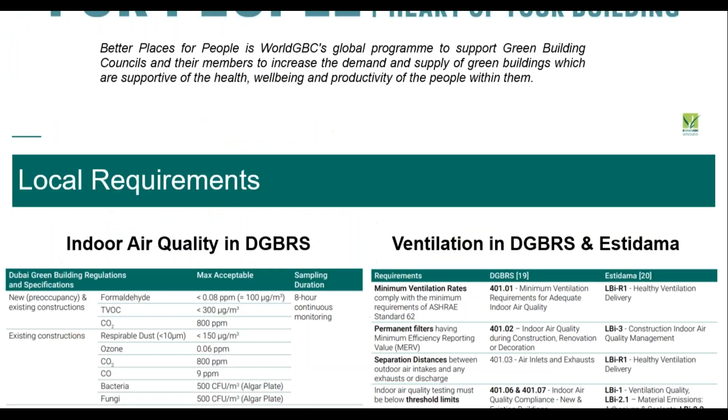Moving on to our next work, just to give you an overview of the regulations and codes we have here in the UAE—there are a number of different building codes which vary from emirate to emirate. On the left-hand side is the Dubai Green Building Regulations and Specification, which is the green building code here in Dubai, with predefined limits for indoor air quality parameters such as formaldehyde, TVOCs, and carbon dioxide.

There are also ventilation requirements both in Dubai and Abu Dhabi, related to the Estidama Pearl rating system. On the right-hand side table, there are requirements for ventilation rates, filters, separation distances, and of course threshold limits for predefined chemical concentration values.

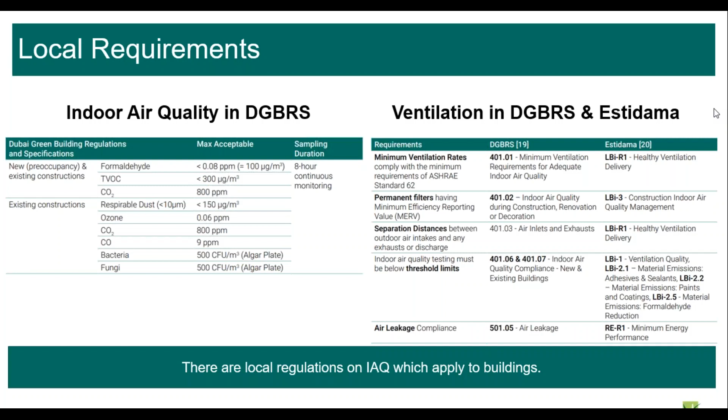Following on from our work trying to increase awareness related to indoor environmental quality, we held a roundtable in 2018 to find out specifically what the challenges and opportunities are related to increasing awareness. It was a general consensus by key stakeholders, including government, schools, parents, and the private sector, that there is a general lack of awareness on the topic, and that more efforts are required to improve indoor environmental quality.

One of the key takeaways from that roundtable was the need to establish more data to set a baseline for indoor air quality within existing buildings here in the UAE.

More recently, a study that came out this week or last week showed that the majority of UAE residents are still unaware of the severe health implications of poor indoor air quality, which is quite significant considering that the World Health Organization says that indoor and outdoor air quality are among the major risks leading to death in the world.

As part of the takeaway point from that roundtable of establishing the need for more publicly available indoor air quality data, we partnered with one of our corporate members, COMPETENCES UAE, to measure and evaluate the indoor air quality parameters of a representative school here in the UAE.

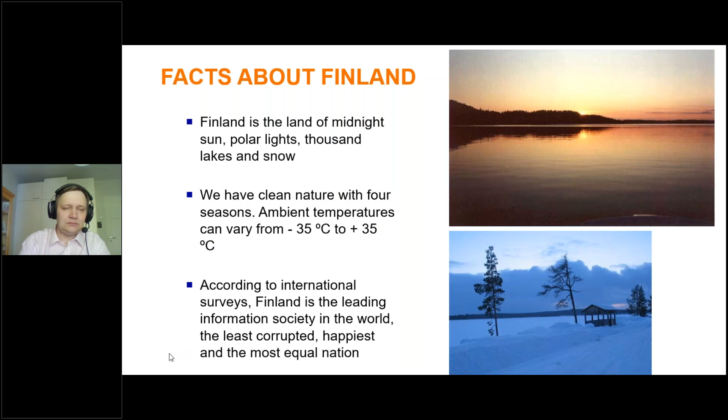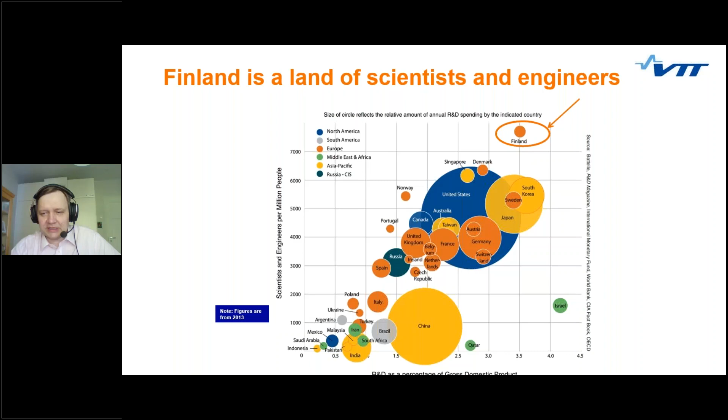The actual content of my presentation today deals with VTT and air quality issues. I will introduce shortly some clean air solutions and some experiences we have learned in field tests we have been running. At the end of the presentation, I will summarize some of the most important lessons we have learned.

First about VTT. VTT is a technical research center, which means that basically the only thing we are doing is research. We do it as a service for companies and societies, but we don't have any concrete products. We always do cooperation with companies if we are talking about products. We are owned by the Finnish government, which means we are a non-profit and impartial organization. It's good to remember that we are impartial in many cases, and we are also quite big if we compare to the size of our population.

The role we are active in is actually applied research, which is located between basic research, done by universities, and product development work, done by industry. Of course, we have close cooperation in both directions, but this is how we see that we are located in this research field.

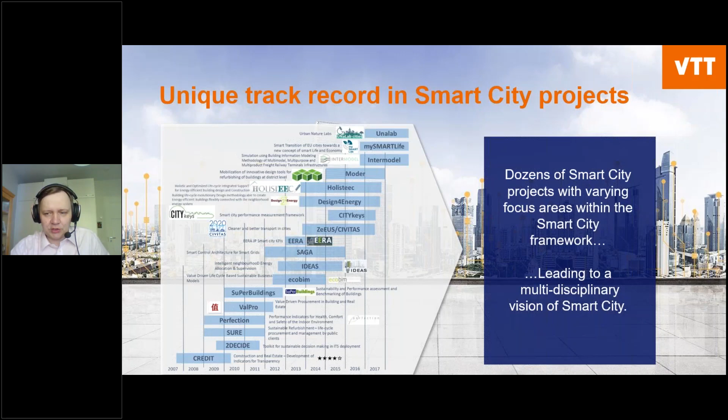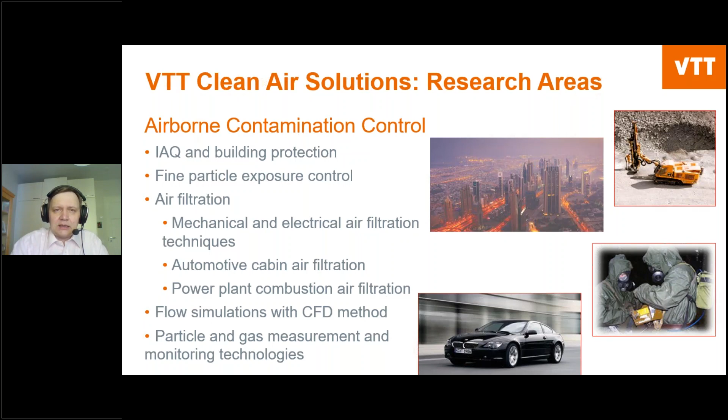We are also doing flow simulation with CFD, which Antti will present more about later, so I won't go into details here. We also deal with different measurement and monitoring technologies, and in any case, we basically try to improve the situation somehow. That is important for us when we do these interventions.

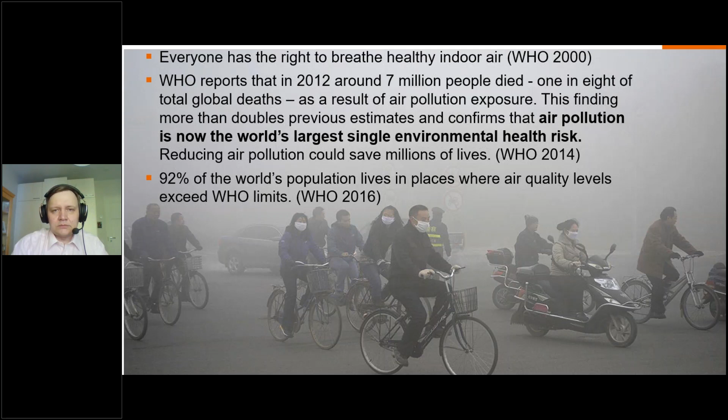As we spend 90% of our time indoors, it's reasonable that we start with these indoor air quality issues. It has been stated that 40% of buildings suffer from some IAQ issues - that's quite a large number, I think. There have also been calculations of how much money is lost because of poor indoor air quality.

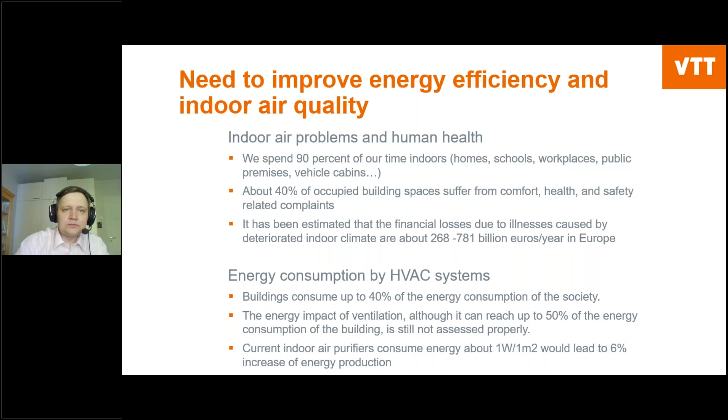One way to illustrate this indoor air quality issue, and especially the money side, is to think about a normal office building and how much it takes to run it. You can see that only 1% comes from energy costs, 9% from rental costs, and 90% from salaries.

If you want to improve things, imagine a 10% improvement in some of these three topics. What's the result? If you're able to improve the performance of the people by 10%, you've actually saved 9% in your financial result, and that's quite a lot. So it's important to understand it's not only a health issue, it's also a money issue.

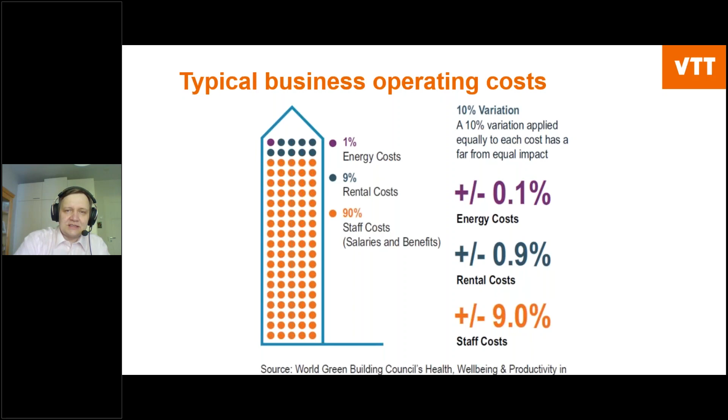There are correlations found between ventilation rate and people getting sick. It's important to understand that the more people inside the building are sick, the less work they're doing, and the less money you earn. That's why it's important to arrange ventilation properly.

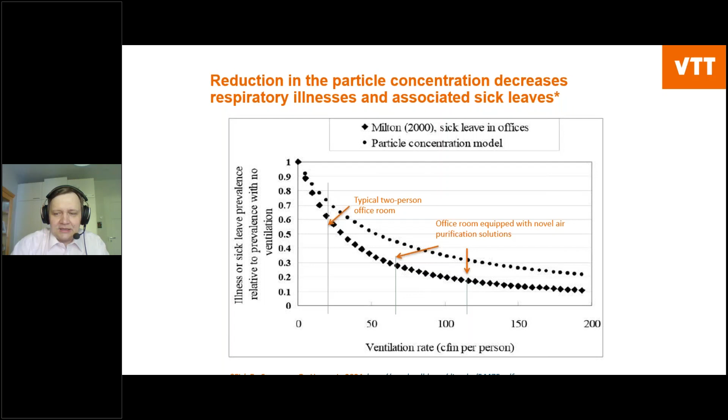It's not only about getting sick, the ventilation rate also affects performance in office work. You can see that especially when airflow per person gets really low, performance goes down. Of course, if you increase ventilation, you get better performance, but there's some limit because it flattens out at larger ventilation rates.

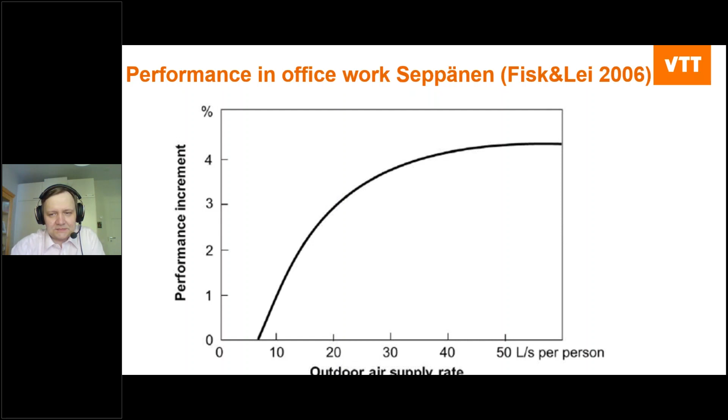A similar pattern can be found for learning results in school. This is based on mathematical tests, illustrating the speed at which students can solve problems. You can see there's quite a good correlation between learning results and ventilation rates, so it makes sense to take care of ventilation.

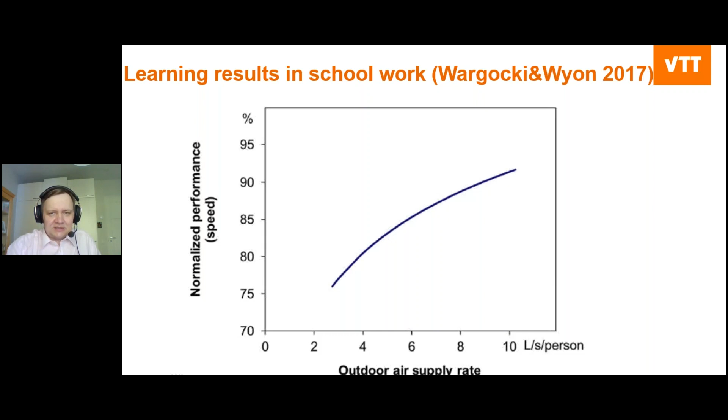So we're indoors and figuring out what's around us: outdoor pollution, the ventilation system, some indoor emissions, leakages, things like that. The conclusion is that if you arrange ventilation, filtration, and air cleaner issues properly, it's actually a convenient way to achieve health and good indoor air quality.

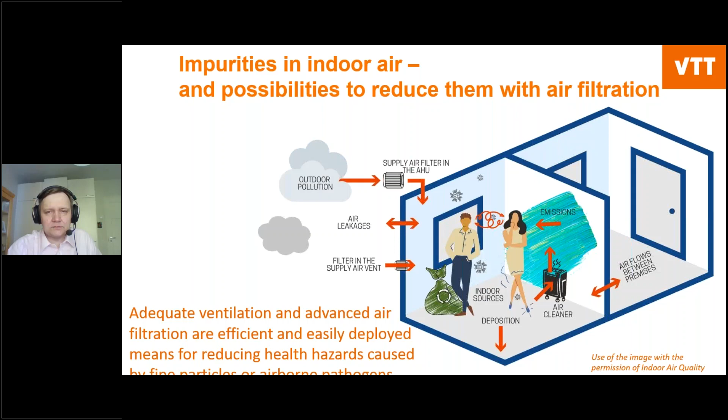This illustrates particles found indoors. At the European level, they've found that more than half of the particles found indoors actually originate from outdoors. So the first thing we must do is figure out how to stop outdoor pollution from getting indoors.

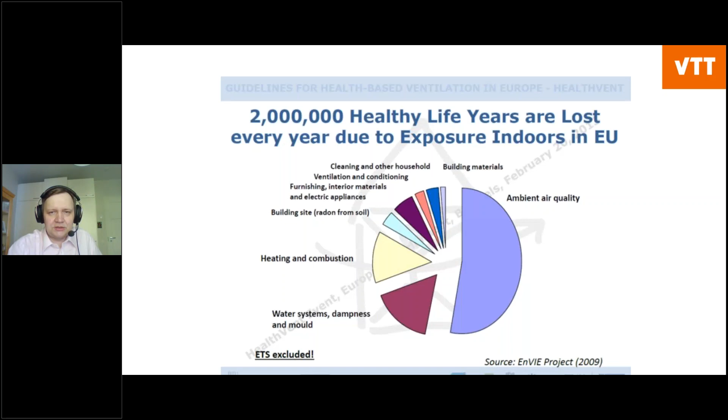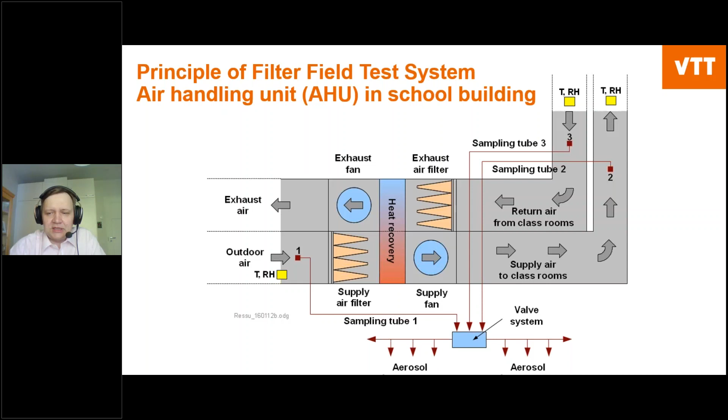So we can conclude that if you want to get rid of ambient air particles, the best thing you can do is use high efficiency supply air filters, because it correlates directly to the concentration indoors.

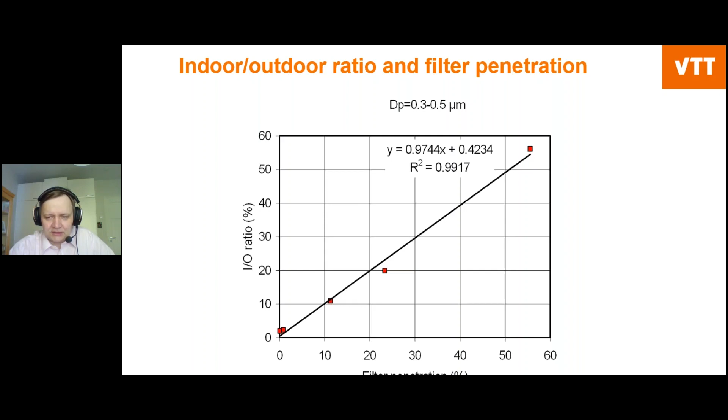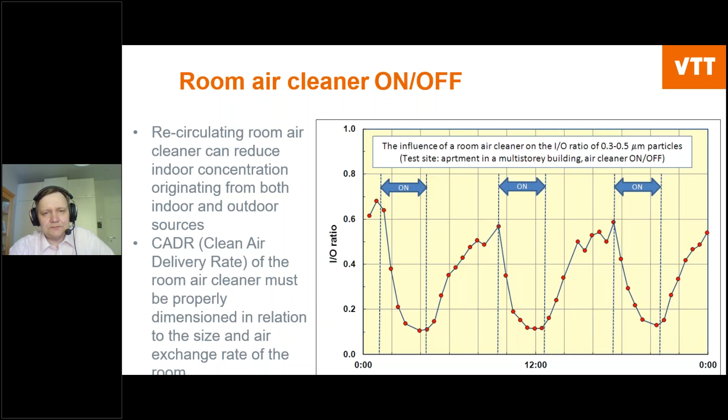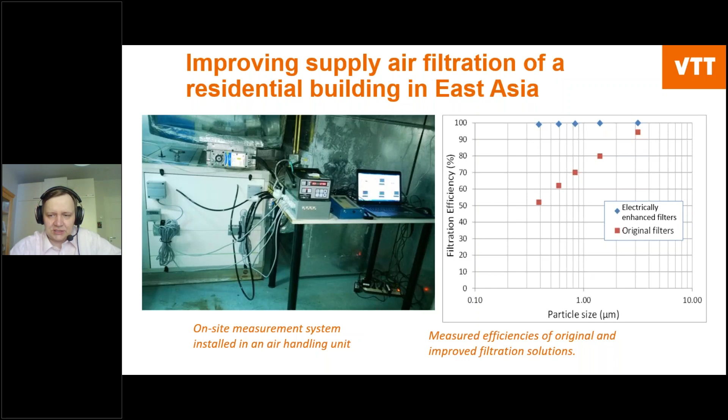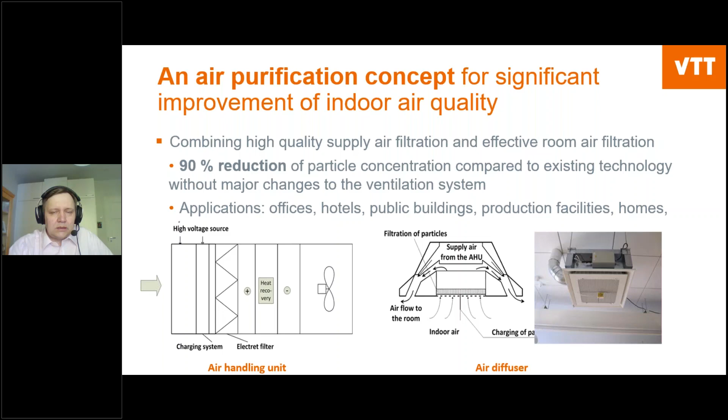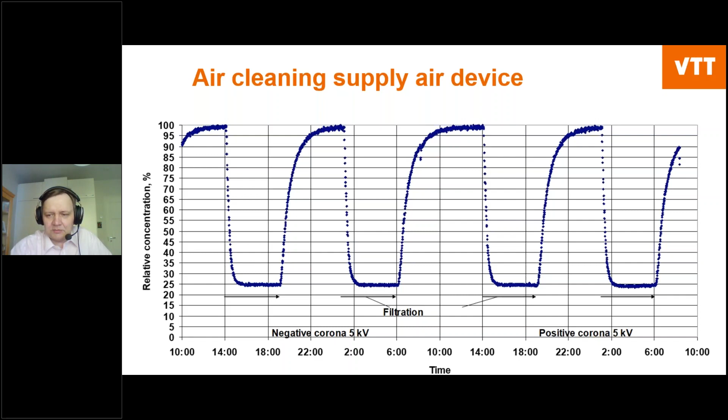Here you can see how much the concentration indoors is decreased since we turned on the filtration, recirculating air in the room. The main issue here is that this device doesn't have any fan, so it doesn't generate any noise. We only utilize flow generated by the air handling unit, which induces secondary airflow indoors, and we filter this secondary airflow. That is the basis of this innovation, and it's actually being commercialized at the moment.

About this corona situation, it's important to understand that all these techniques are also valid for reducing the effects of pandemics like COVID-19. There has been guidance from REHVA, the European Federation of Heating, Ventilation, Air Conditioning Associations, who have published quite nice guides, so maybe you can find them on the internet later.

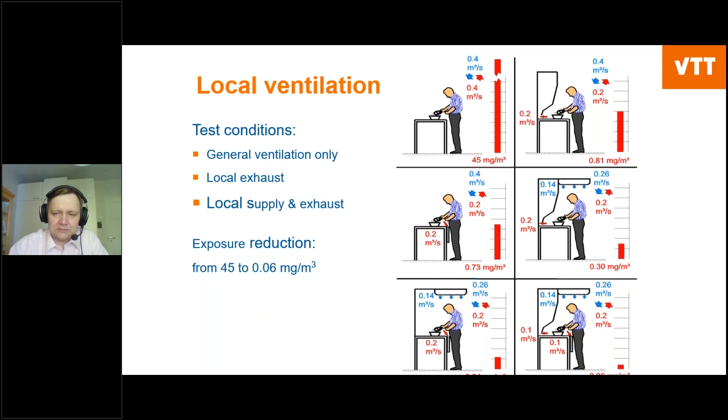Then I brought up the most important issues as to why I think we should invest in good indoor air quality. Of course, we can guarantee health and clean air, productivity and a comfortable environment for occupants - that's for sure. We are able to stop ambient pollutants from penetrating indoors.

We can use room air cleaners to reduce the concentration indoors. We must guarantee enough ventilation to make sure that human performance is okay indoors. At the same time, we need to minimize the energy consumption issues used by HVAC systems.

And at the last line, I think it's important to remember that indoor air quality correlates also with economy. So it's not just about health, it's both health and economics.

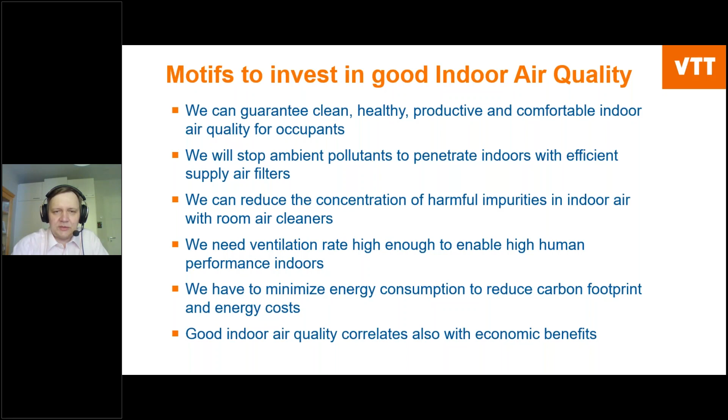How to proceed - I would say it's important to understand that in Finland we have many companies who are actually forerunners in indoor air quality technologies. The products are based on long-term R&D cooperation between research institutes and companies. In Finland, we have a strong public-private partnership, which is one way to bring these products forward.

VTT is happy to provide R&D services if you are willing to discuss these issues. We also have this indoor air quality ecosystem in Finland, which presents several companies who provide products and services related to indoor air quality issues. I know that many actors are actively seeking partnerships in global markets, so if you have something in mind that we could do together, I will be more than happy to continue the discussions.

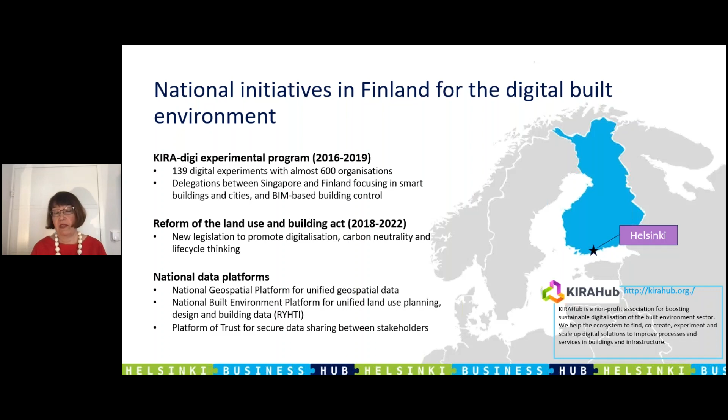Why has digitalization been so important in Finland? About 5 years ago, the Finnish government put a lot of money into raising the digitalization of the built environment. There was a KIRA-digi experimental program where the whole construction industry—R&D, cities, companies—participated. They ran 139 digital experiments with almost 600 organizations. This gave a good leap to the digitalization of the construction sector. This continued after the first 3-year KIRA-digi project, and it's now continuing in KIRAHub, based in Helsinki, which still accelerates the digitalization of the building sector. One very important thing in digitalization is securing data sharing between stakeholders, and I think indoor air quality is one kind of data we definitely want connected to all other data from buildings and so on.

Helsinki also puts a lot of focus on digitalization—not just for its own sake, but to help people's everyday lives become easier by giving services through digitalization. There are also many projects going on in the mobility area, like robots, buses, and drones being tested in Finland. There's a Whim mobility app which connects all kinds of mobility options into a single app and helps you find the right way of moving around Helsinki.

What is needed to digitalize society? Open data is a stronghold there, you need to be able to use the data to develop digital services. Cybersecurity plays an increasing role because we are all the time on the web, on the internet. Finland has the strongest cybersecurity cluster in Europe. And then, as a Nokia heritage, there's great mobile device know-how, so wherever you move and go, you will be connected by your mobile phone, whatever the digital solution is.

I also want to mention the circular economy. This is growing a lot, also in the construction field. There are special projects going on in Finland looking at how you could increase circular economy in the construction area. Helsinki also puts a lot of effort there. We definitely want to bring environmental issues to the whole area, not least in the construction sector, by digitalizing it, by doing circular economy things, and so on.

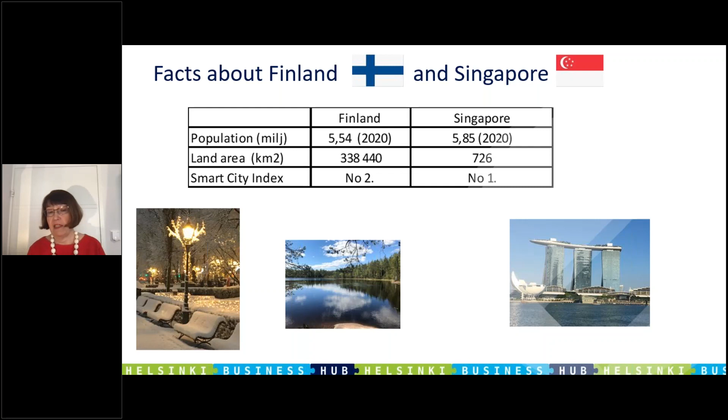If you compare Finland and Singapore, it was already mentioned that we have about the same population. Singapore is a little bit smaller than Finland in land size—in Finland we have a lot of forests and lake sites. But what is quite common for us, we both rank very well in the Smart City Index. And as Aimo stated in his presentation, I think indoor air quality could also be part of smart city ideas, or closer to smart buildings, because the effects of indoor air quality relate to what happens outdoors and then indoors.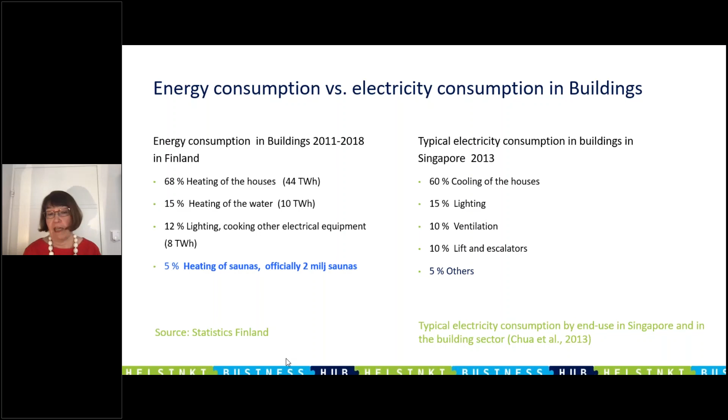If we look at energy consumption, electricity consumption in buildings, the difference between Finland and Singapore—and I believe UAE could be close to the Singaporean numbers—you use a lot of energy for cooling of the houses. In Finland, of course, it's the heating of the houses. But when we look at lighting, we're about the same level, and of course there are a lot of high rises in Singapore and UAE, so lifts will use a lot of energy too. But saunas are not much energy consumption in Singapore or UAE, while we use 5% of our energy for heating saunas in Finland. For 5.5 million people, we have over 2 million saunas, so every family has at least one sauna.

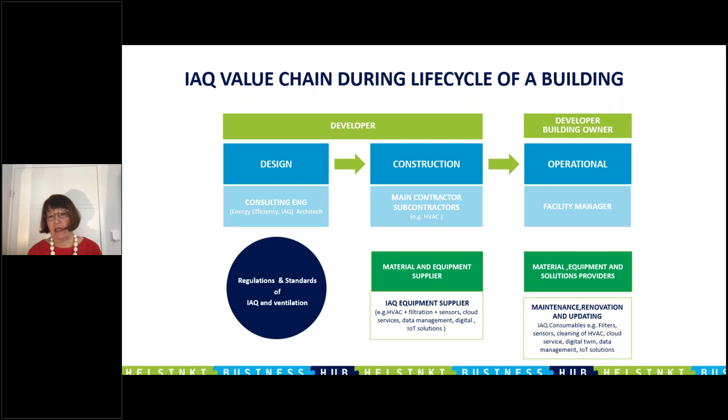And what is good with Finnish people? Finnish people and Finnish companies are really reliable partners who stick to contracts and deliver on time, and they are able to do world-class indoor air quality solutions.

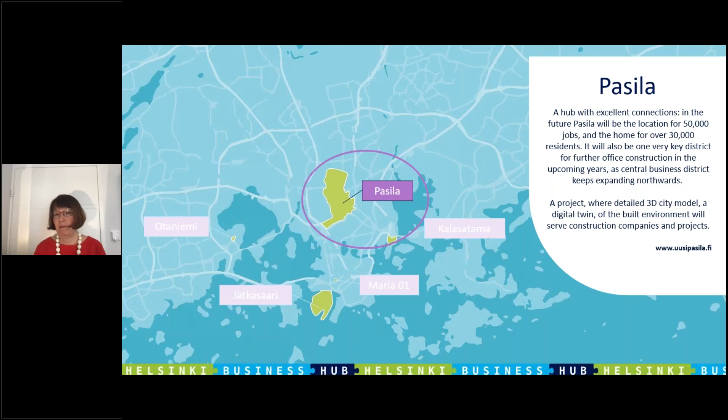Kalasatama is the smart district in Helsinki, which has started a lot of agile pilots. It will finalize the project this year, and they will spread it all around Helsinki. The main thing in Kalasatama has been this public-private-people partnership, so all of society has been attending - citizens, R&D organizations, companies - to run different kinds of trials there, from smart mobility to smart buildings and everything in between.

Maria 01 is the one which offers the ecosystem for companies to come and work together. There are startups, investors, and larger companies. It is the leading startup campus in the Nordics, and it wants to be the European leader in 2026. It already has over 200 companies there.

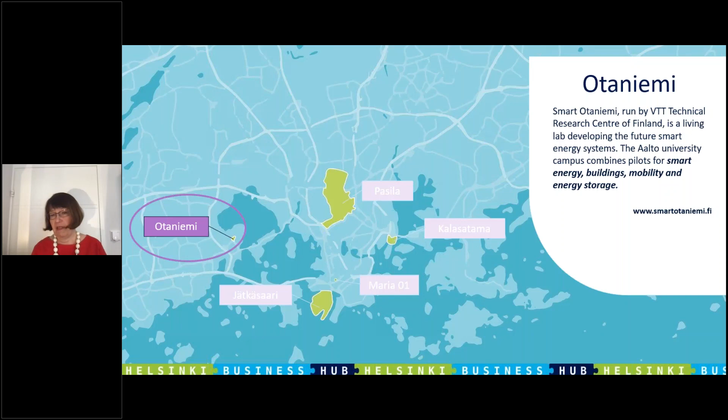In Otaniemi there is also the VTT Research Center, which I was representing. There is also a lot of energy-related development sites where people can participate. And Aalto University, of course.

Last but not least is Jätkäsaari, the modern urban district where mobility kind of applications are tested - smart mobility piloting here.

So I'm happy to help you, if you have any questions. We have also recorded a podcast about cities and businesses and how life is in Helsinki. We wish to build sustainable Helsinki together with you, with your solutions, sharing our solutions, partnering, matchmaking you with Finnish companies. There is also a short video about a 100-year-old building which was brought to this time through digitalization. Thank you very much. I hope you enjoy it, and feel free to contact me anytime for any questions about the industry or piloting opportunities. Thank you.

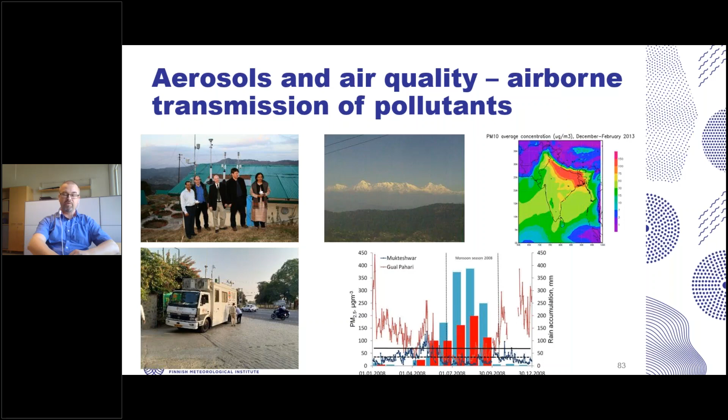So we started to discuss with medical doctors and virologists about the possibility of different transmission routes of COVID-19 when the situation arose about a year ago.

Typically what we learned was that there is this threshold of 50 micrometer particles — particles bigger than that are called droplet transmission, which is the conventional way respiratory viruses are transmitted. When you sneeze or cough, big particles come out, and that's why it's recommended to keep 2 meters of safety distance, so these big particles wouldn't reach the breathing zone of the other person.

But then there's aerosol transmission, traditionally said to occur below 50 micrometers — these particles travel along, especially in indoor air, very similarly to the India example I showed, traveling far and lingering in the air for a long time. There's also surface contamination, because these droplets fall on surfaces and can even be resuspended from the surface.

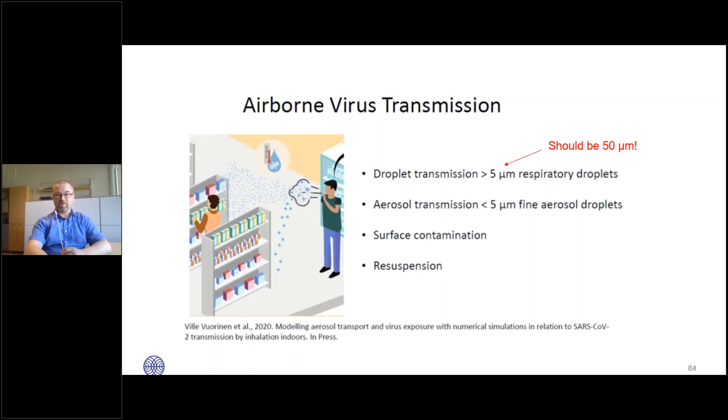So we decided to conduct a study together, and the aims were to simulate airborne virus transmission indoors using a real virus. We had experts at the University of Helsinki microbiology department with big experience working with surrogate viruses, who selected for us a virus called Phi6, which is a bacteriophage of a bean, so it's completely safe for humans and safe for this kind of action.

We wanted to spread it in aerosols and see if the virus actually survives and if we could detect it with different methods in a restaurant. In addition, we wanted to develop a supercomputer model that we could test for safety solutions, allowing better control of pandemic safety in the future.

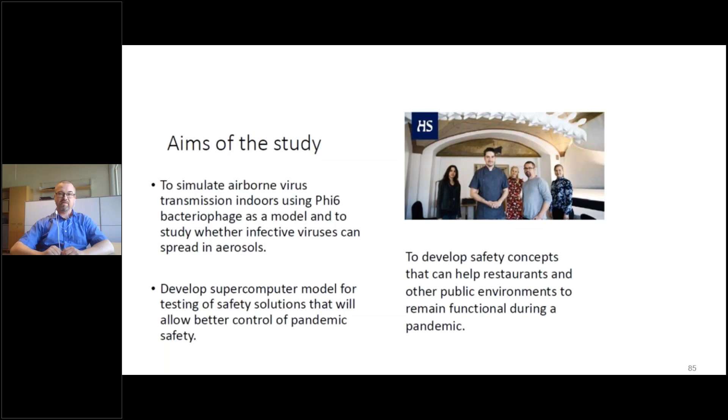The underlying motivation was to develop different safety concepts that could help restaurants and other public environments remain functional during a pandemic, so you wouldn't always need to shut everything down, but rather shut only the necessary parts down or use different safety concepts to keep things open. We collaborated with the famous Finnish chef Henri Alén, who kindly let us conduct these experiments in his restaurant in Helsinki.

So what we did in the restaurant is that we used a medical ultrasonic nebulizer producing virus-laden aerosol, which simulated an infected person speaking or breathing in the restaurant. We measured the size distribution of particles coming out of that and verified that the nebulized aerosol size distribution is very similar to that of typically respiratory emitted aerosols.

The restaurant, called Ultima in Helsinki, was about 60 square meters in surface area, and we nebulized a very high concentration of the Phi6 solution in the air, much bigger than what you'd typically get from a sick person. But this is needed in our measurements because what we wanted was a proof of concept, to actually measure and see what happens in the aerosol, and with real concentrations you are not able to do it. So this is the best and only way to do it.

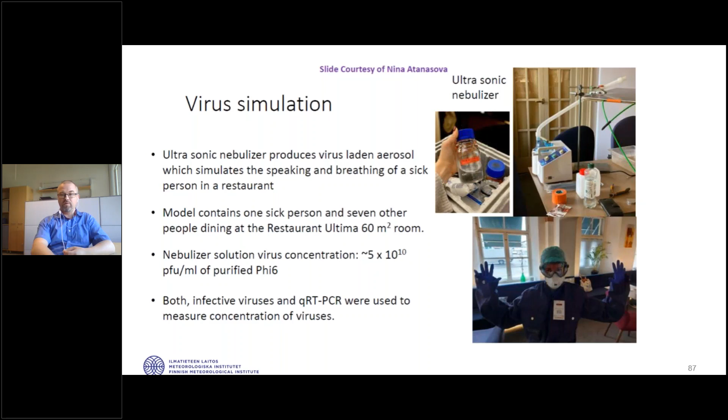And then we measured both infective viruses and the number of all viruses, whether they are alive or not, from the restaurant.

We did active air samplers, different kinds of aerosol samples were taken, and then passive deposition samples, so petri dishes with virus host and a soft agar layer where the viruses could be deposited, and also surface sampling by swabbing samples directly with either a cotton swab or with a finger.

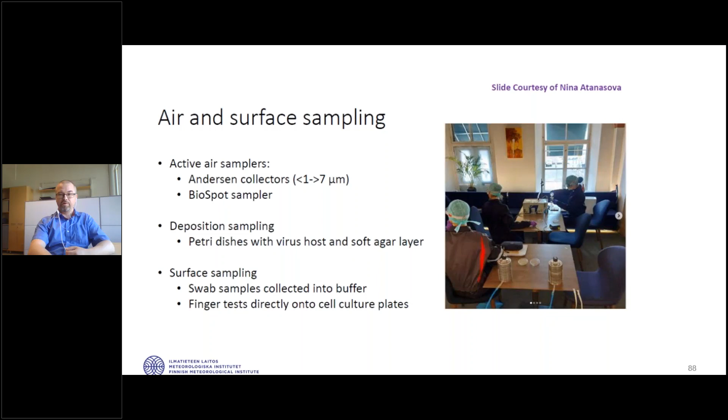And there you can see the researchers in the restaurant during a simulation day when they are working with the samples.

The other method we used was computational modeling, specifically a large eddy simulation method, which is a computational technique for accurately resolving fluid flow. Basically, it simulates the air currents going into the room. You need to first make your measurements of the ventilation, where the air is coming from, where it's going to, what are the temperatures and pressures. And so we did that.

And what you additionally need is a supercomputer, because this LES method is computationally very heavy. But there you can see an example in the picture of a simulation situation. And if you are wondering what this sort of a ridge there means, it's actually an ornament hanging from the roof of the restaurant.

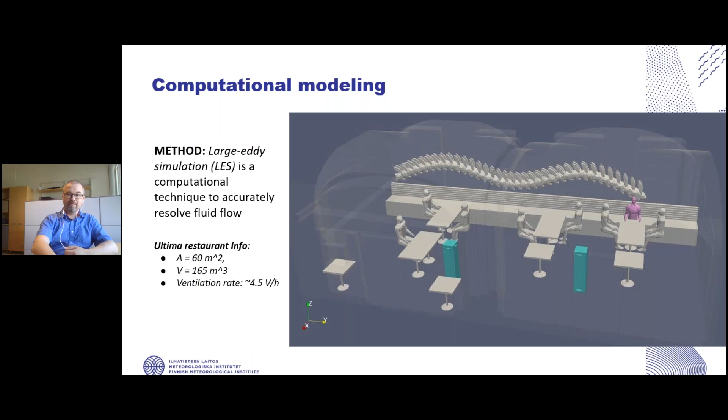Then we go into some of the results that we obtained from the study.

First of all, what we wanted to see was a proof of concept: whether the virus actually stays viable and how far it travels in the restaurant. Here you can see on the left-hand side a 2D map looking from above of the restaurant. If you can see my cursor moving, there is the nebulizer, so here is our sick person sitting on the top right-hand corner. This is where we nebulized, simulating a real dining event. The nebulizer was on for 90 minutes, and we wanted to see how far viable viruses travel.

On the table on the right-hand side, I've selected some data from our measurements. First of all, you see table A, table C, table D, and so on. And you see two different times: first the duration, so when we took the Petri dish after this 90 minutes of dining, and you see the living virus, now in the very right-hand column there called PFU, plaque forming units, that were on the Petri dish.

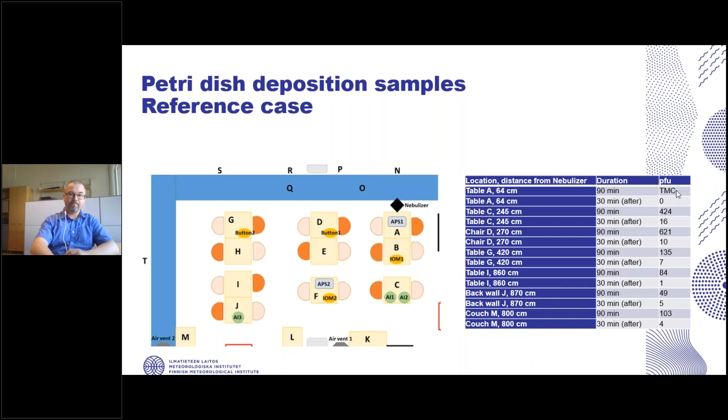Then we tested different kinds of safety solutions. Here I have mean aerosol number concentrations measured with, as you can see in the corner, a fraction of the map of the room. APS1 was our first aerosol instrument and APS2 was our second. On the bottom right you can see three graphs showing different safety solutions: using air purifiers, using space dividers made of plexiglass, or using a combination of both. Before the reference or intervention, our concentrations are actually very low, so we are pushing a lot of particles into the air.

During the reference simulation, when we don't have any purifiers in the room, you can see the concentration for APS1 and APS2. Then during the intervention with purifiers, the concentrations have decreased maybe 25% roughly.

Then with the space dividers, the same comparison between reference and intervention: for APS1 we actually see a higher concentration, which is expected since it's in the very vicinity of the nebulizer. But APS2 doesn't show any visible action—there's no decrease in concentration. The combination of both gives results very similar to the dividers alone.

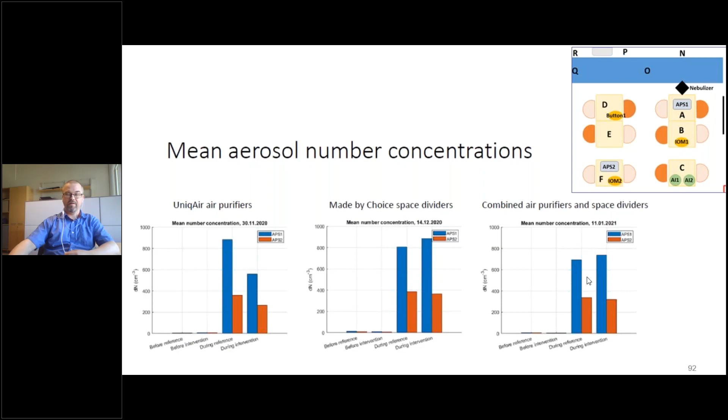Now we come to the computer modeling results, which are very high resolution—I'd say state of the art in the world. Nobody can do it better at the moment, at least for this kind of live case, and we built up our capacity to do this kind of modeling a lot during the project.

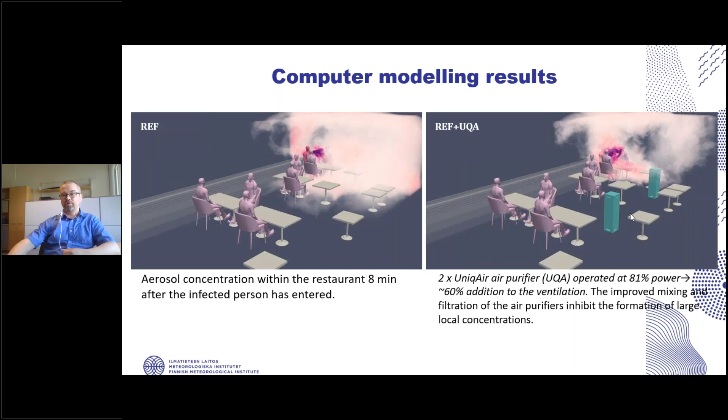On the left-hand side you have a reference simulation showing aerosol concentration in the restaurant 8 minutes after the infected person has entered, and you can see this cloud of virus starting to spread. The same simulation at 8 minutes, but now with air purifiers on—we had companies in the project who delivered their purifiers, and using these added 60% compared to the typical ventilation rate in the room, and they also helped mix the air. You can see somewhat lower concentrations occurring, and you'll see it even more clearly in the next pictures.

With the plexiglass dividers, you can see there's basically no effect. The aerosol particles go above and around them, finding their way with the air currents. In fact, they create pockets of high concentration within the cubicles, because the air cannot mix inside this kind of enclosed plexiglass environment. If we use both plexiglass and air purifiers together, the situation is a little better, especially in cubicles not right next to the infected person.

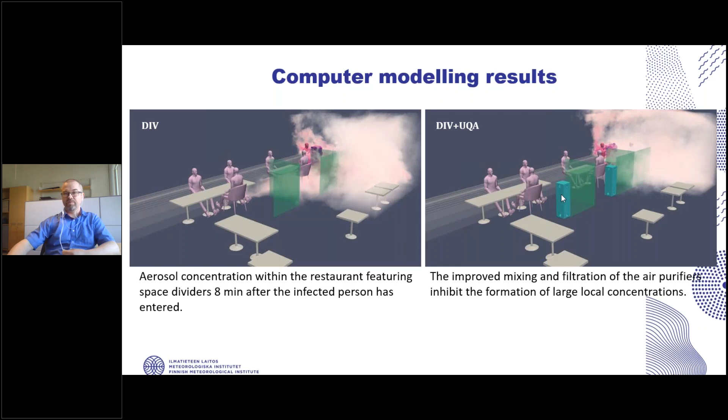We also did a probability of infection analysis. This isn't based on our measurements or our emitted virus, but on literature values for how much virus a person can emit and what would be the infective dose. These numbers are still highly uncertain—there's high uncertainty both in how much a person emits and what the infective dose is. But literature values exist, and that's what we used.

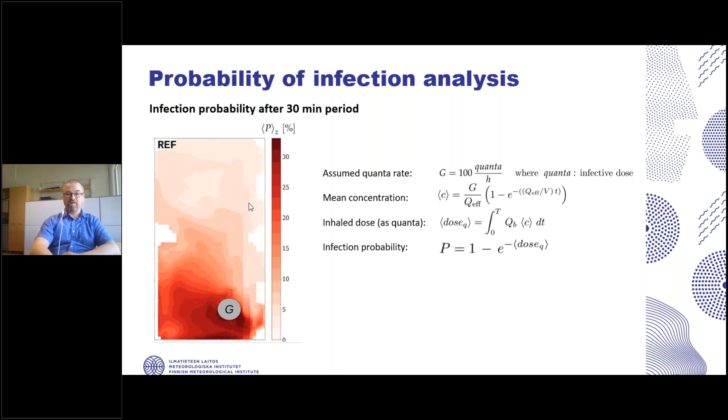I add here three more pictures, and what is shown here is the difference between these safety solutions and the reference case. If you see blue, that means you decrease infection probability, and if you see red, you worsen the probability of infection.

The first picture is the reference with air purifiers. You can see some air maybe going the wrong direction, but most of the room shows blue, meaning we can decrease the risk of infection by up to 20%.

If you use the dividers, the situation is worse. You can see that you actually worsen some of the situations in the next cubicles, shown by the red color.

If you use a combination of both, the situation is mixed. It's not quite as good as air purifiers alone, but it's way better than using dividers alone. So air purifiers improve mixing and ventilation, but capacity must be sufficient, and space dividers alone cannot be recommended as a safety solution.

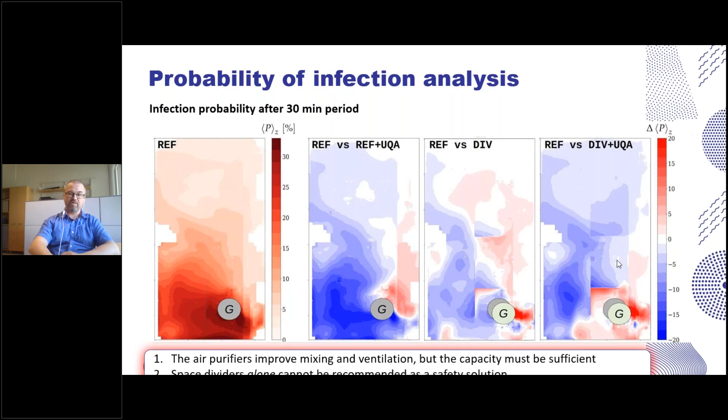Conclusions from the study: with properly sized air purifiers, infection probabilities can be reduced significantly. We found that both mixing and filtration are important. The mixing dilutes local concentration and enables outlets to remove pathogens earlier, and filtration in the air purifiers reduces concentration, particularly after long time spans.

Alternatively, you can ventilate. In Finland it's easy most of the time, especially this time of year, we can open the windows. I understand this isn't possible in hot countries, or if we go back to my first slide, India, where concentrations of outdoor pollutants are very high - you don't want those coming inside. So basically we need technical solutions so we can ventilate our indoor environment safely, and Aimo presented these in his first presentation.

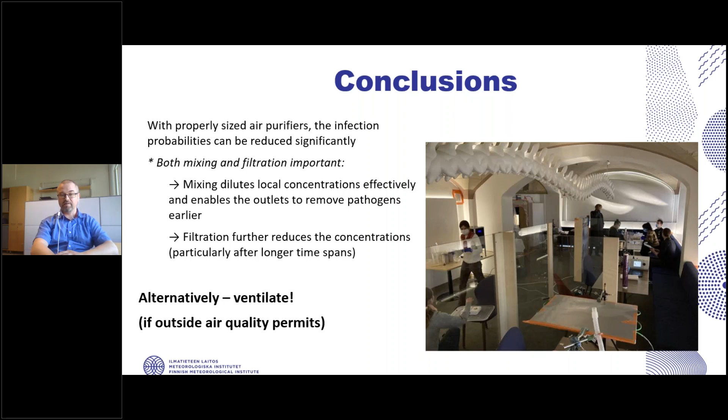A final reminder that there were plenty of interdisciplinary actors participating in the study, and the financing was done by Business Finland. Thank you for your attention.